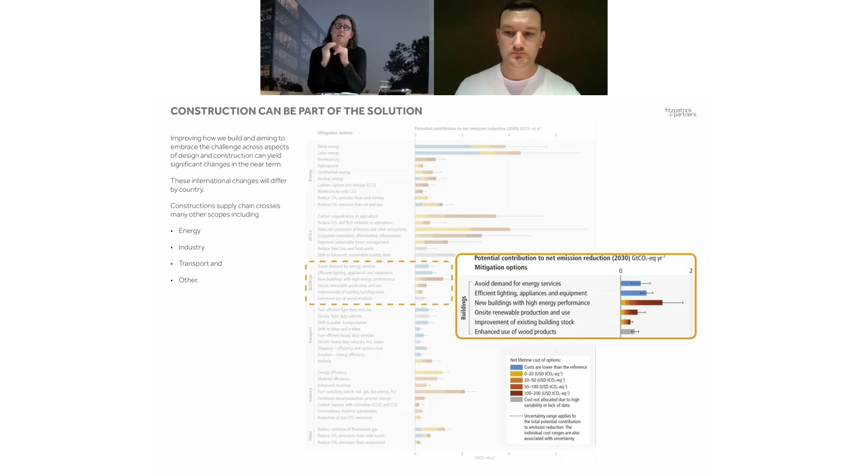So that's about avoiding energy, energy efficiency, making buildings high performance, putting renewables on site, improving existing buildings, with the exception of the bottom one, which is the use of timber products, and more on that later. The rest of them are really about operating carbon. These are global numbers. These aren't specific to Australia. But I think we would all know that buildings and construction also have an impact on energy, industry, transport, and even some of the stuff that sits in other.

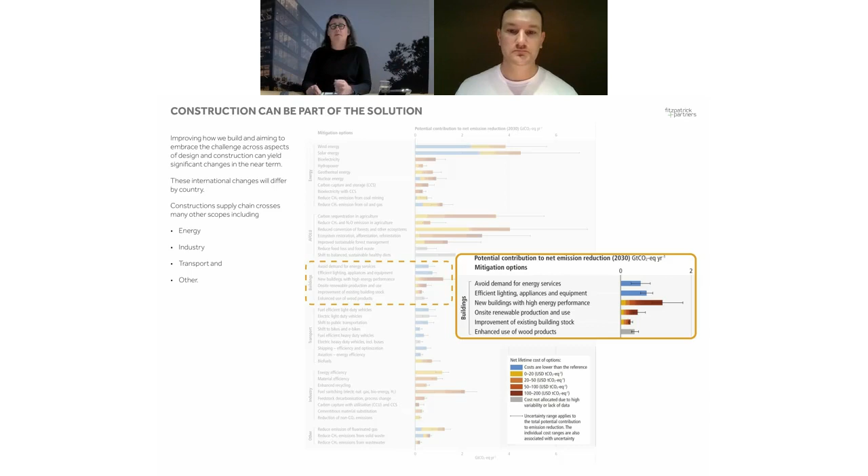So holistically, we sit at the centerpiece of consumption in construction, which is to say that the building site is where everything gets consumed. All of the products that we use to build the building and all of the things that we consume energy with are consumed in the building, but the influence of that is global, both in emissions, but also in positive and negative impacts more broadly.

So to just drill into the energy one, for example, and this is a diagram I'm sure a lot of people are across, buildings are responsible for 39% of the energy-related CO2 emissions as at 2017, of which 28% is operational carbon and 11% is embodied carbon. Embodied carbon being the carbon we build from, operating carbon being anything with a plug. And where that needs to go, you can see this line follows that parts per million line quite well, and where it needs to go as of now is straight down. So that's quite a big shift.

Why do we need to do it? Why do we care? Well, reducing the amount of carbon in the atmosphere obviously will mitigate the impacts of climate change. It'll improve public health, boost the global economy, maintain biodiversity, and in simple terms means that we have enough air, water, and food to be able to feed ourselves and future generations.

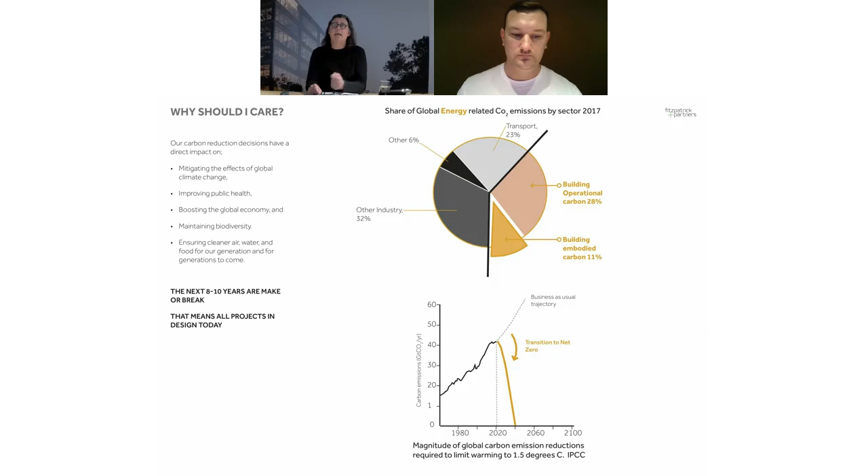Now, given the trajectory and given some of those planetary boundaries we talked about, the next 8 to 10 years are critical. Now, for the vast majority of us architects, what that means is the projects that we have on our drawing boards now are at play in this space. We need to act now and act decisively.

Architecture, as I'm sure everybody would agree, is an act of optimism. We project ourselves into a future that is as yet unwritten and unknown and unknowable, and we propose a position as to what the buildings of the future should be. But architecture is a key contributor to climate change. So how do we square the circle on that? How do we remain optimistic and still build? What can we do about it?

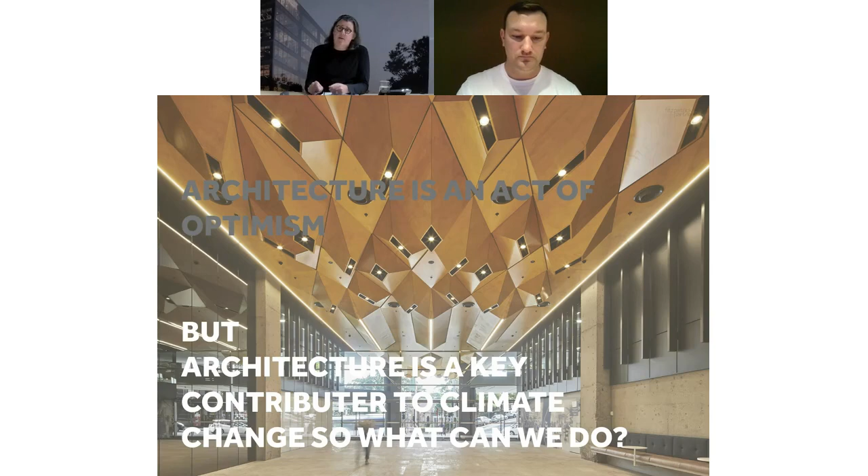Well, the first thing that we can do is understand all of the various bits and pieces of jargon. Hint, top corner. This whole world of carbon is new to an awful lot of people. If you went to university when I went to university, we weren't trained in this, and you're having to learn it now, and there's a degree of change associated with that, and people don't like change. But the first thing is understand the language of carbon, understand what causes it, and what the differences are.

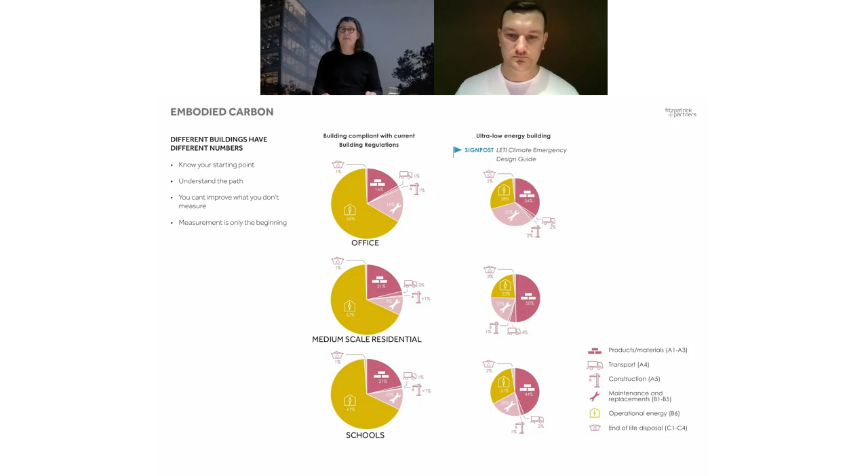And then how we can improve is by measuring, and measuring is just the beginning, because once you measure, then you act. So drilling into that one step further, looking at that embodied carbon component, this is taking the office piece. We now are talking about 48% being in the product stage, with 45% in the maintenance stage. Of that 48%, which represents effectively upfront carbon, we break that down further into the superstructure and substructure as the primary components, amounting to about 65%. Again, all of these numbers are generic. Anytime you see percentages, they're not based on a specific building, they're based on generic overall numbers, so it's important to keep sight of that. Hint in terms of question.

But structure, facade is the next big one for office. Again, this is just office. Then MEP, then internal finishes. Looked at another way, and I find this bottom diagram really quite helpful. If you look at the top 5 components there, upper floors, foundation, envelope, frame, and piling, they all represent somewhere between 10 and 20% of the overall embodied carbon of the building, and they all have the biggest impact to change. Get to below that, internal walls represents maybe 7%, ceiling finishes 5%, floor finishes less, and external works less again. And then obviously the capacity to make change in these is still there, still not insignificant, but it's nowhere near as big as structures and the overall piece around the envelope and structure of the building.

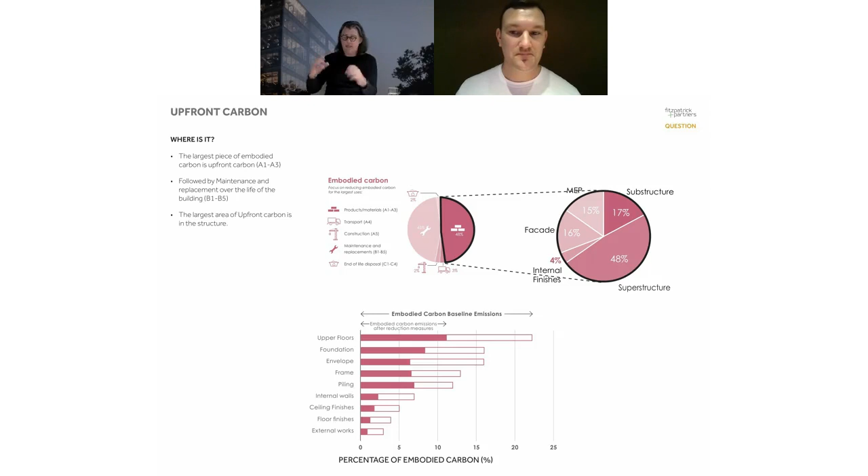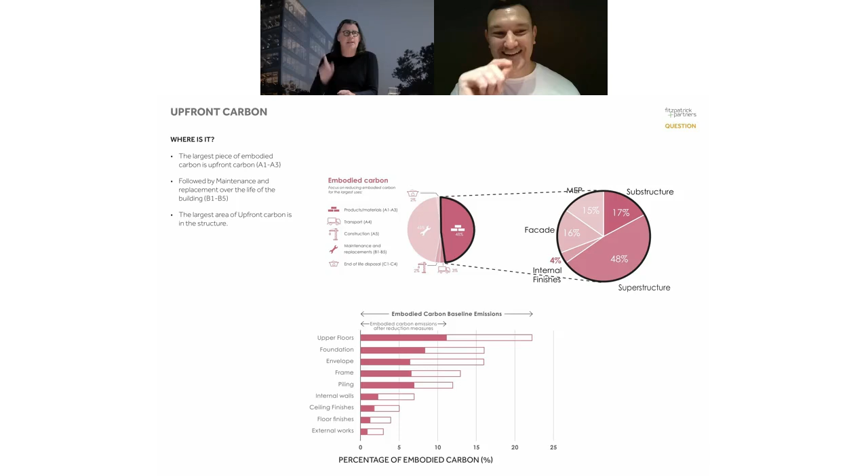Paul, just very quickly, we can't see your cursor. So okay, right. So if you can't see my cursor, anytime I say hint, have a look in the top right-hand corner for question. Yeah, sorry. No problem.

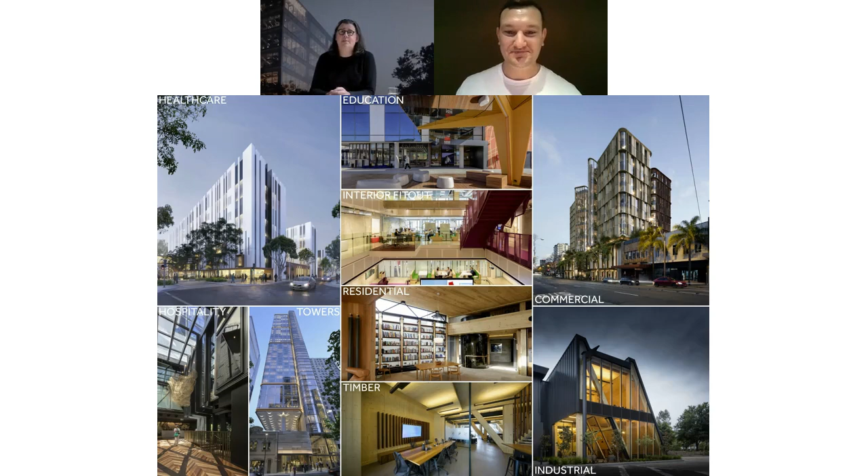So who are Fitzpatrick Partners, and what are we doing about changing things? What part do we have to play? So as I said earlier, we're a firm of architects of about 40 people in Sydney. We've been around for about 21 years, got quite an established reputation across towers and healthcare and commercial buildings and a series of other things. And we've had a passion for timber for quite a long time. We developed, as part of our sustainability action plan, a series of strategies and principles to work through across all of our projects.

So in the first instance, looking to not build on greenfield sites or avoid it as much as possible, building in density into our cities, planting more than we remove, reusing already spent carbon, which is existing buildings, and not forgetting in all of this discussion around sustainability that we actually design for human joy and delight. The middle line is a series of moves in terms of carbon in general. The first of which is all of our buildings shouldn't have fossil fuels in them. So we seek to avoid that at all costs wherever possible.

We then obviously design with minimizing energy needs as a focus. Then the use of green power, strong emphasis on minimizing embodied energy, which as you saw in those previous diagrams, becomes an increasingly large component of the overall pie. And then finally offsetting what we can't already remove. Our goal is that strategically sometime between 2030 and 2050, and I'd like to think sooner rather than later, we become a fully regenerative design practice.

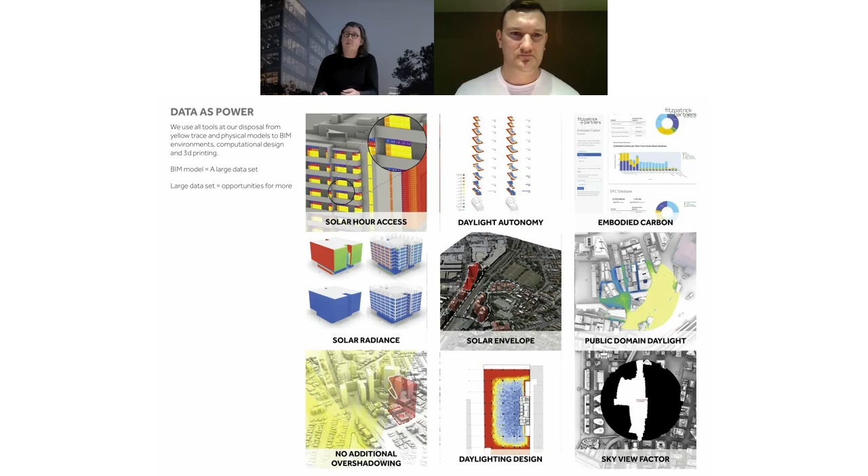So our approach when it comes to embodied carbon, drilling into that in a bit more detail, is first and foremost to question everything. Be very careful what information you're basing your actions on. This is relatively new space for lots and lots of people. Everybody's on a journey of learning. There's nothing wrong with that. It's great to ask stupid questions, and I'm always a big fan of asking stupid questions because you learn something.

Learning to focus on the big wins, structure being a key one, obviously. Devise actionable approaches that go beyond principles or airy-fairy words, but as you'll see in some of the case studies I'll show in a second, really actionable ways to remove and reduce carbon. And being really careful of unintended consequences, because not all roads lead to the same place.

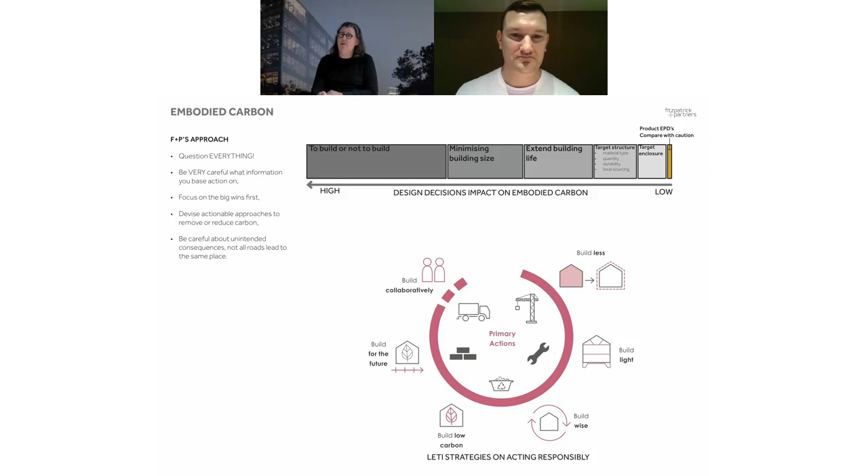The two diagrams on the side talk to how we can minimize embodied carbon. First thing is, do you need to build it? Second thing is, what size do you need to build it at? Third thing is, can you use a building that's already there? Then target structure, then enclosure, and then really getting into the finer details of EPDs and specific products. The bottom diagram's a LETI diagram, same logic: build less, build light, build wise, build out of low carbon materials, build for the future, and build collaboratively.

As architects, we have a great position in terms of advocacy. We also have a great position in terms of our role in construction. 80% of the life cycle impact of a building is locked in at that foundational stage up to schematic design. So that's when we do the passive principles of solar orientation and wind orientation, the sizing of the building for its use, the definition of the overall aesthetic, the window wall ratio, defining the systems that are used within the building. That all happens in the bottom of that fat triangle.

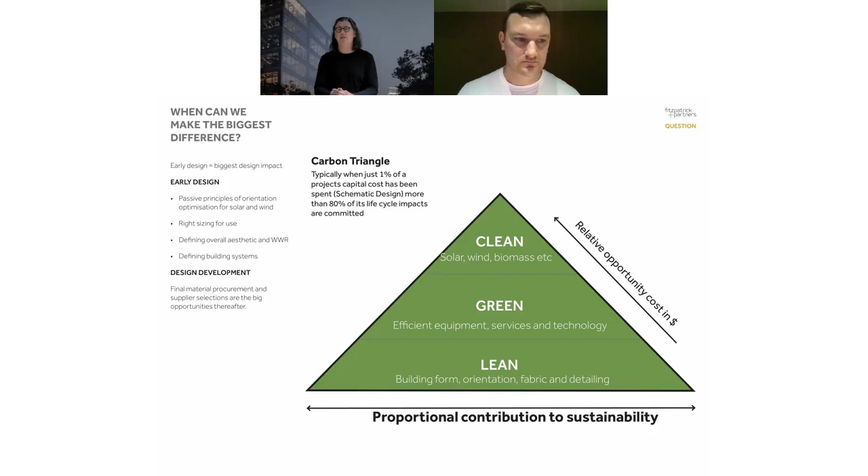And then as you go further and further towards the top, you get into building, material procurement, and a whole series of other entities about design for disassembly and things like that. But the relative cost of making change later in a project, it's the same old bell curve as you've seen for many other uses. But we as architects need to realize that there is power in our position, both in advocacy and in the decisions that we make.

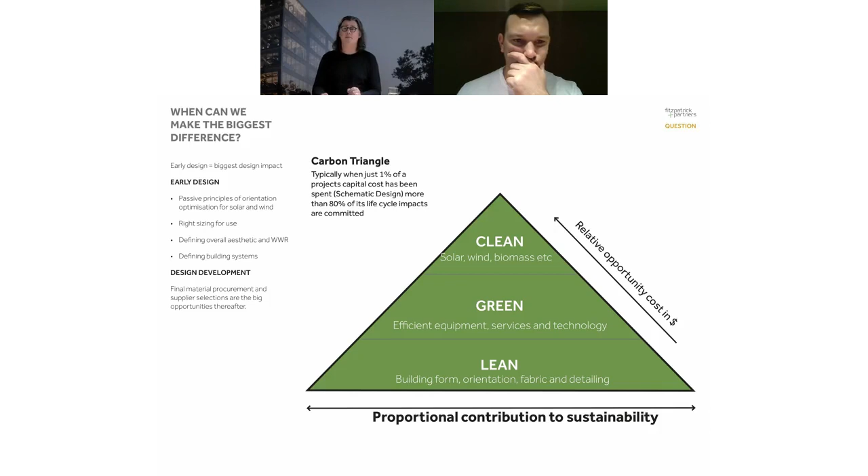And there's also therefore great responsibility. So let me go through some case studies. I'm going to go through, in the first instance, 73 Miller, and then step through a few other projects, just really to give you an understanding of how these projects are acting and how we're growing over time a body of knowledge.

73 Miller, office building from the 80s, completely unremarkable to my eye. Existing lump of carbon, if you want to look at it that way. A tenant was moving out, building needed a major refurb, potentially being pulled down. The strategy that we employed was to keep the existing building and to honor all of that existing carbon, but not the existing form, rethink that, reskin the building, and come up with a new entity.

In doing so, importantly, we wanted to honor the existing carbon that was spent in all of its roughness and glory. Typically we talk about building reuse in either really fine heritage examples or really robust 19th century industrial buildings with great beauty in their detailing. This was a 1980s office block built in the 1980s with the mindset of the 1980s. So what we sought to do was take it and reuse it as an entity of not heritage value, but of carbon value, of existing building value, warts and all.

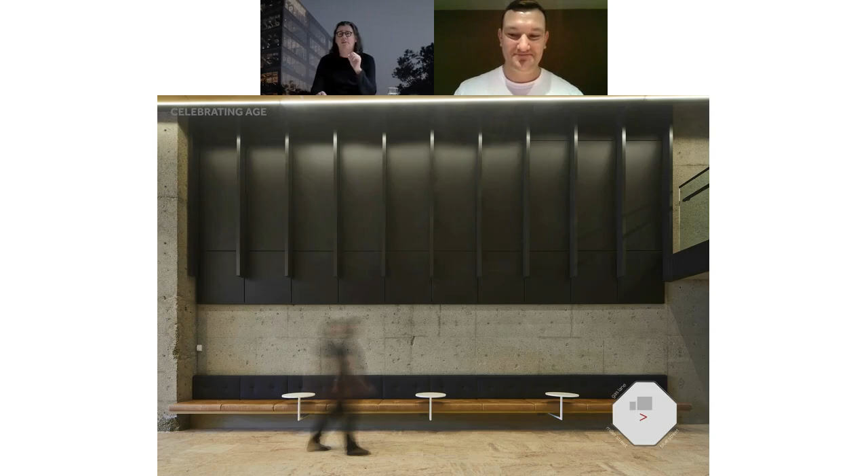So we bush hammered all of the concrete walls in the lobby, including all of the little knockoffs and little areas of imperfection, and really played them up against the new finishes that we brought in. So we had this really strong relationship between existing building that was there as a reality, and the new elements that got brought in to bring to life a new office component.

So the outcome of that was that we took 15,000 square meters of an existing 1980s building, let's call it a carbon sink, and we reused the existing structure, some of the services, and we took the material that was the dominant material in that, being concrete, and we honored it in the narrative of the building. So it became this kind of unique positioning for the building because we kept the existing 15,000 square meters.

We then added 4,000 square meters and were able to achieve a structural carbon for the overall 19,000 square meter building of only 21 kilograms of CO2 a meter squared. That's ridiculously low. But it was only that low because we reused 15,000 square meters of it.

So the outcome is a new office building designed for the future, 5-star Green Star, using green power, really set up well, that only used 4,000 square meters of structural carbon and reused 7.1 million kilos of CO2. So a really good outcome.

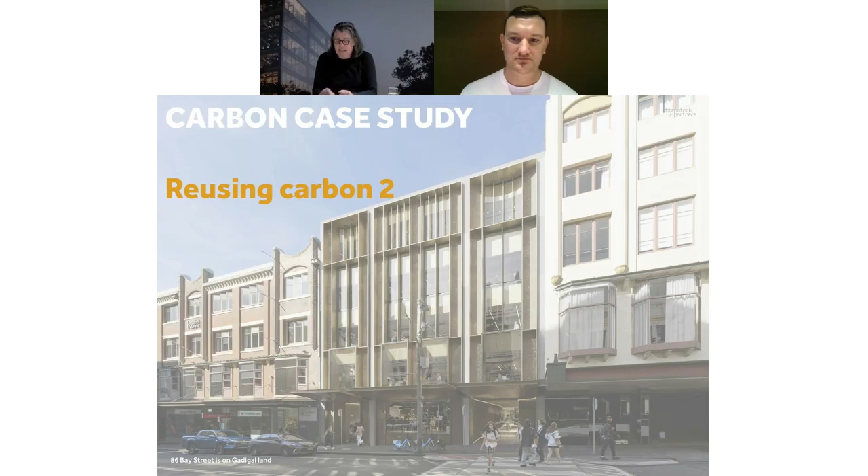Second one is a building that's just gone in for DA in Ultimo. And again, it's a similar strategy, similar mindset. We've got the ugly duckling building in the middle between two really fine heritage items on Bay Street in Ultimo. The building in the middle is a 4-story building, 3 stories here and 1 below, in concrete from the 60s. It was a detracting building in the urban environment, according to council. Couldn't agree more.

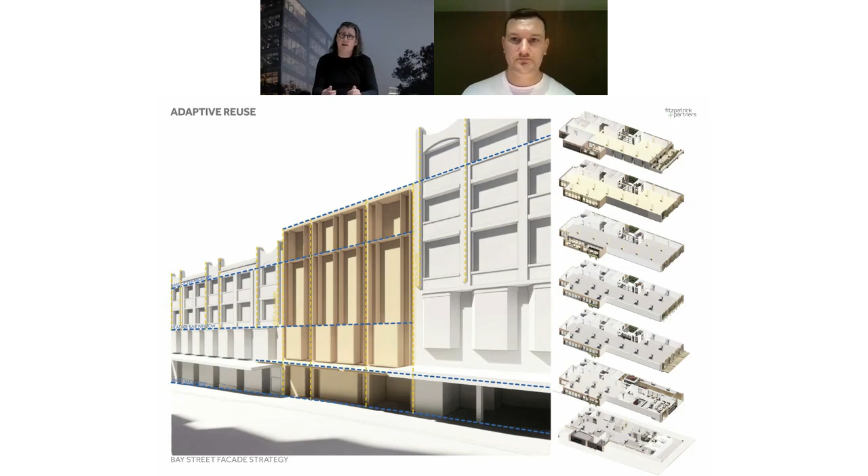But rather than having a solution that pulled it over and put a new building in its place, we sought to again reuse that existing carbon and avoid needing to use more. In order to solve the contextual proposition, we added to the building. So we added 3 stories on top of the existing 4. Picked up on a lot of relationships with the facades of the 2 adjoining buildings to provide a building that really sat well in its context.

In having the opportunity to reposition the building completely, we worked with the existing structure, but we cut a hole in it for a light well. That gave us the ability to cross-ventilate the building. We put a solar farm on the roof. We had a real focus on the embodied carbon. Obviously, it's a fully electrified building.

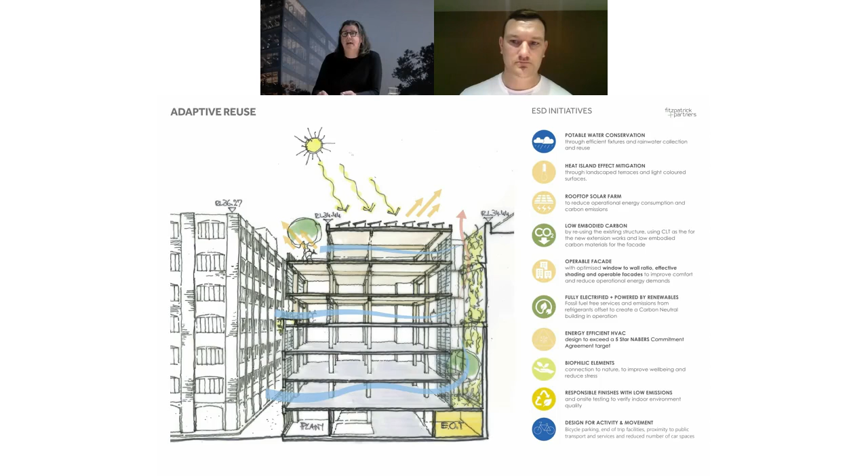And as we tend to do with all of our projects, we've summarized it in a slide like this, where we've summarized the key ESD initiatives along the side and really focused in on how the building can have a positive impact.

So you can see in the section on the right-hand side, we kept the car park level, replaced an awful lot of car park with end of trip, maintained 2,200 square meters of office space on the next 3 floors up, cut a courtyard into it that then meant all access via the lifts was through this central courtyard, allowed us to naturally ventilate the floors, and then added on top of that 3 floors, accounting for about another 2,000 square meters of floor plate.

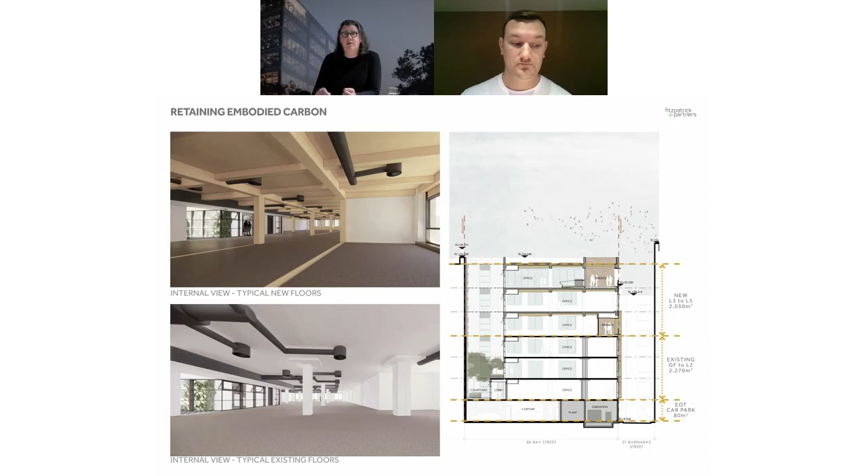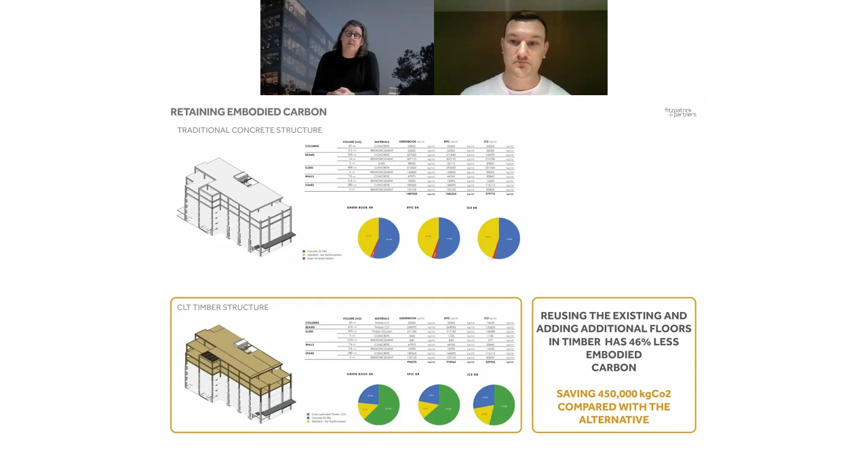Top 3 floors we did in timber. The bottom floors we maintained in the existing concrete. In doing so, we analyzed the building relative to an alternative. So as it says here, we saved 46% in embodied carbon by doing it in timber. Another way of looking at that is, if we did it in timber and that was the base case, had we chosen to do it in concrete, we would have added an additional 80% on top of the carbon necessary to build it in timber.

Why would you do that? The ultimate solution here saves, or avoids the spending of, 450,000 kilos of CO2 for a really small, modest building. So scale isn't necessarily an issue. We can do it at any scale and we can have an impact no matter where we are.

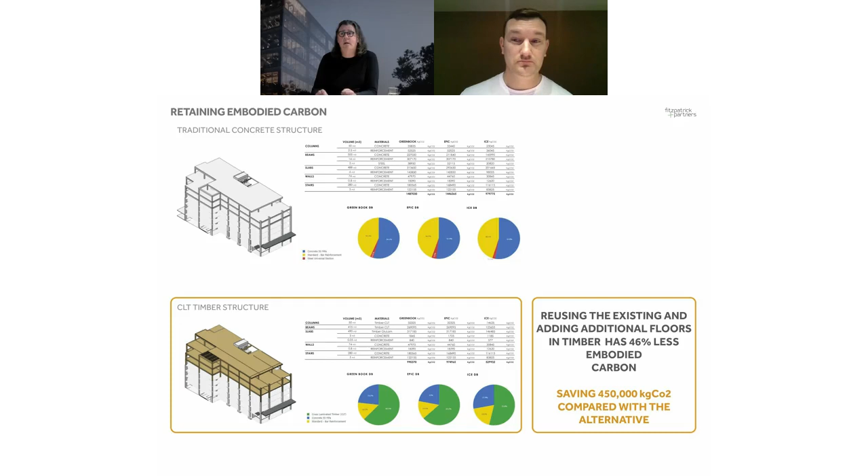Timber is a key theme for us. We've been investigating timber for 15 plus years now across all kinds of typologies. These are all buildings that in one way or another integrated timber as part of the solution, some built, some not. We are at the point of really being a timber first practice, and that comes from a carbon centric logic, but also the beauty of the material. And hence we're very aligned with Stephen, with Abodo, in terms of where they're headed as well.

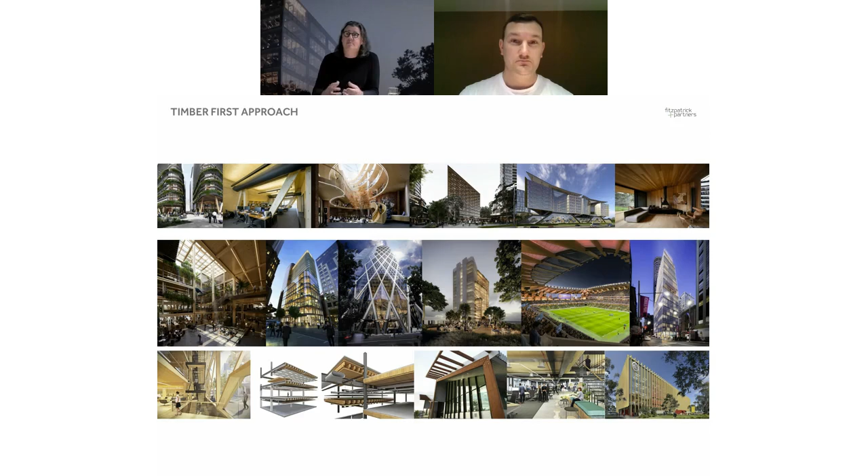So with timber first as an approach, we're very proud of buildings that we're just finishing now in timber. This is the Bond at Northwest, our first completed office building, full office building, I should say. We've got one around the corner that's much smaller, a little office building as an extension.

So next case study. We're flying through these, Steve.

Next case study is structure and facades. This is 44 Waterloo, which was an office building we did somewhere in between various COVID lockdowns at Macquarie Park. We did the design for this. It's about an 18,000 square meter office building, the first of 3 generic speculative office buildings, so 5.5-star NABERS, conventional low temp, low flow VAV system is the mechanical solution. Its orientation is about 45 degrees to north. And again, you can see the summary of the various ESD initiatives that we've undertaken on this project.

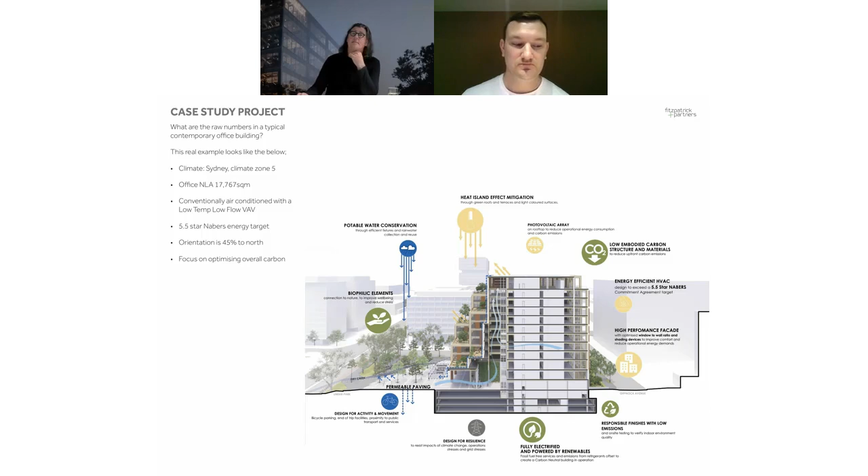I'm going to focus in on 2, the first of which is about structure and again, carbon. The second of which is about the facade. We also spent a long time focusing on things such as providing outdoor space on every level for tenants, having a human scale base to provide activity, both focused on trying to get people back to the office and out of home. We also looked at central atrium for passive return air. The structure at the bottom left-hand corner was a big thing, understanding it, pulling it apart, trying to get the best out of it, and then operating carbon in terms of the facade will be the second thing I touch on.

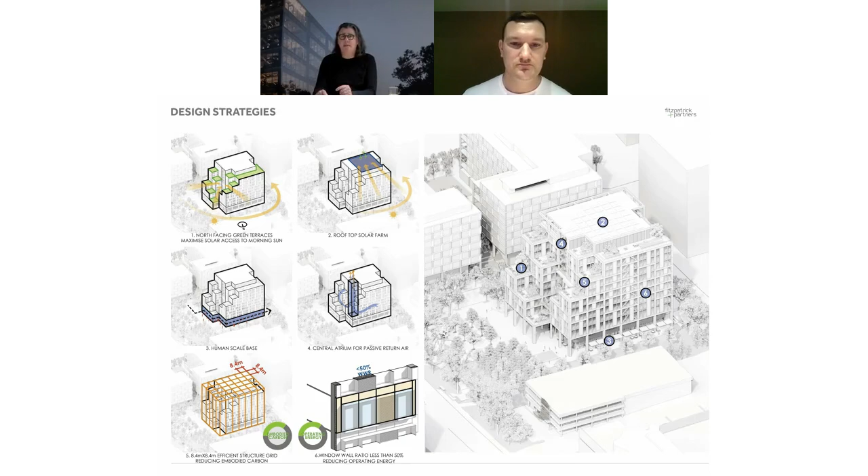We did a study as part of Architects Declare, a group of 5 different firms teamed up with 5 different students to understand embodied carbon using eTool. So we had a great student who worked with us from Sydney Uni, who worked through with us the 6 or 7 images on the screen here, the structure that lies behind them all, starting with the benchmark, which is where we thought we would be, a 9 meter by 13 meter concrete grid for the building, and then working our way through a series of different solutions from pure timber to timber concrete hybrids to option 2 in the middle there.

The 28.5% saving is all concrete, but an 8.4 by 8.4 grid rather than a 9 by 13 grid. And that was a real eye opener, that just by changing the grid and understanding the design in that regard, not working with material at all, we could make significant savings in the embodied carbon of the building. And that really talks to efficiency and where we do and don't use it.

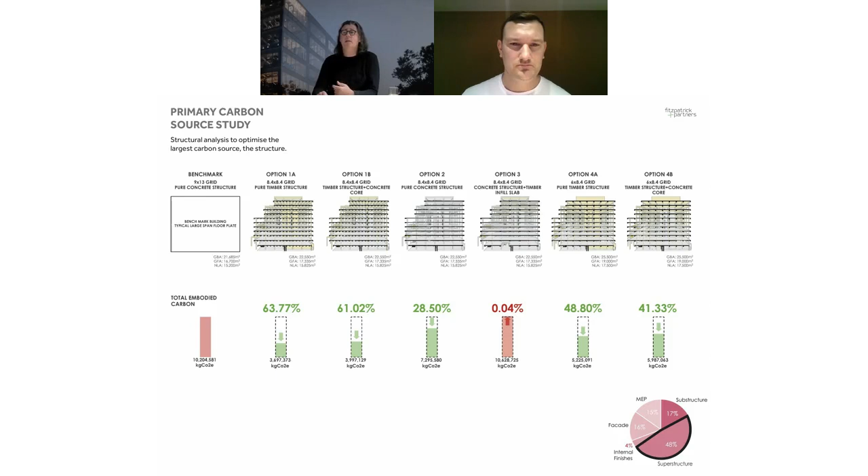And with all of these numbers going across the board, we were able to benchmark them relative to the starting position on the left-hand side. Diagram on the bottom just reminds everybody that we're talking about that 48%. So this is the biggest moves that we can make on the biggest component we can make at the start of a project. We can look at those across square meters as well, rather than across the whole building, and bring it down to a per square meter kilograms of CO2 that's in the structure. That's again really useful because we can now benchmark across multiple projects.

So doing this exercise, we learned an awful lot about not only which one is best and why, but also where the carbon is in each of the options, what the difference is in end of life versus start of life, and a whole series of other things. But the study took quite a while. It was 4 to 6 weeks, I think, to do. And we asked ourselves, how can we have this level of iteration on projects more quickly, internally? Do we need to go to eTool, or can we develop our own app?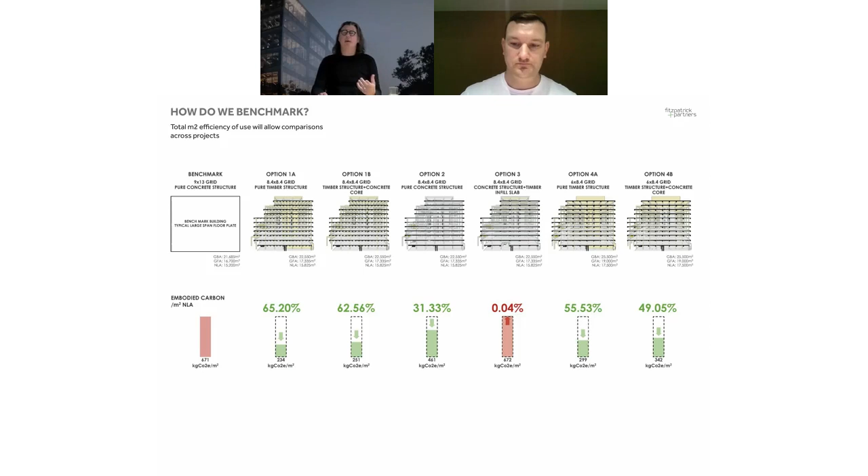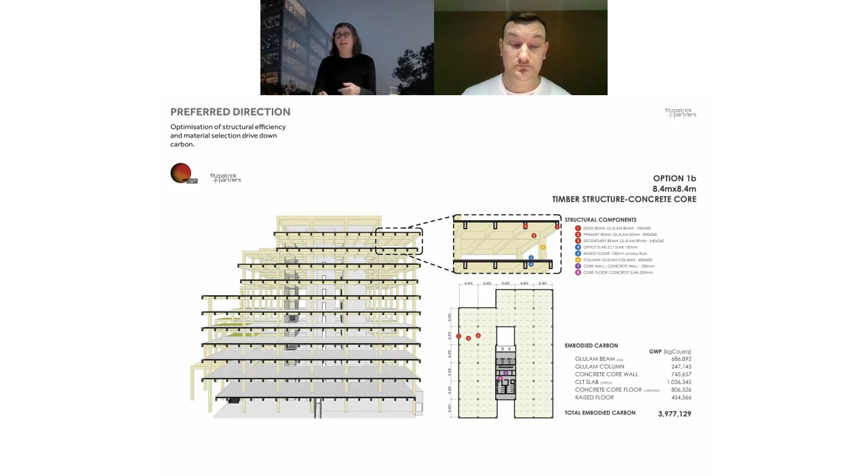So we devised all of this understanding. We had learnt, I suppose, the basics. And then from here, we launched into developing an app that would allow us to gain similar levels of knowledge more quickly and iteratively across projects. So the app is at, for those of you with a pen in front of you, www.embodied-carbons.com. And it very simply takes the structure that we've already modeled well in BIM, takes an Excel spreadsheet of that structure as volumes effectively, drag and drop that into that blue box in the middle there, and it immediately represents that in 3 different data sets.

The 3 data sets that we have internally are the ICE data set, which is publicly available, the EPIC data set, which is publicly available, and Greenbook, which is subscription data that we've got from Greenbook. So all 3 data sets tell slightly different stories. And it's not for us so much the question of which one is right. None of them are, because all 3 of them are generic numbers. So by definition, they're not right.

But it's getting relativity. So why is the ICE number 6.5 million kilos when the EPIC number is 12 million kilos and the Greenbook number is 9.9 million kilos? In order to understand that, you need to drill into what are the 3 data sets measuring. It's a very interesting rabbit hole, but one I'm going to avoid just for today.

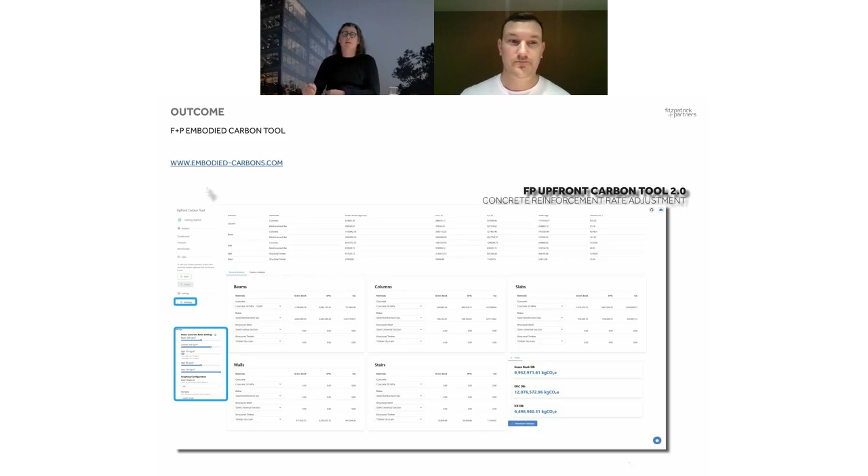The other things that the tool allows you to do is to look at the various building elements, beams, columns, slabs, walls, stairs, and be able to adjust the materiality. So we can go from 50 MPa concrete to 32 MPa concrete and see what the impact of that has on a kind of a live counter down the bottom here. We also have the ability to have conversations with our structural engineers about reo rates in the various entities and understand the impact of them. Because if I go back a page, when you look here, the yellow bar is actually reinforcement steel. So quite a large amount of it is sitting in that.

Now, you've seen this diagram already. The great thing about this tool now, this is our internal version, our external version doesn't yet have this, we're still working on that, is that we can benchmark across projects at that per square meter rate. So we can see the ICE information represented as the blue cross, the EPIC information as the purple box, and the green dot represents the Green Book information, and you can see where they sit relative to each other.

You can also see, and these are all live projects, so from left to right, the first 5 are the 44 Waterloo project that you've already seen. The next 2 are 73 Miller, both as proposed and as original. So the carbon that's in that is really the gap between those 2 numbers rather than anything else. The next one with the double circle around it is Bay Street. So that's, again, a reuse project. And on the far right-hand side is the Bond.

So we can see across all of our projects, quite openly and quite truthfully where the carbon is, and which projects are performing better than others. And we can, over time, start to understand why. For example, the third one over from the left is one of the options for 44 Waterloo, but only to ground, whereas the fifth one over is the actual option that we went with for 44 Waterloo, but including the substructure. So you can see, even including for a very large basement, that fifth one is better than the third one.

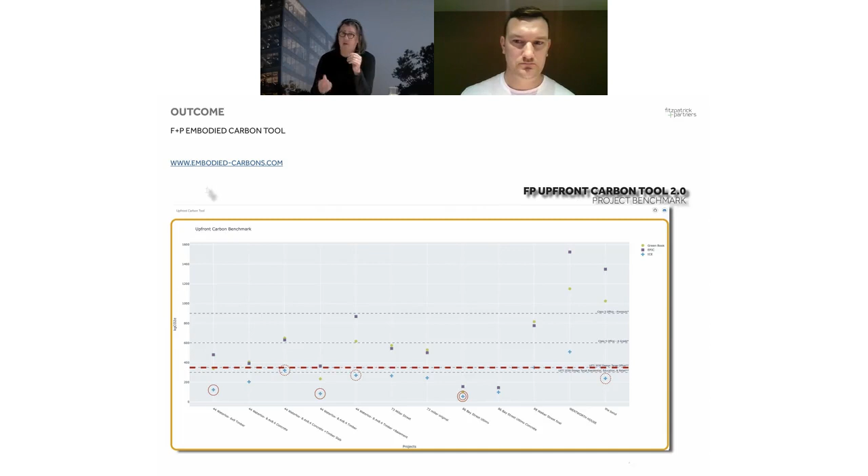So really starting to understand and drill into those numbers is quite a powerful thing to be able to do, and a really good exercise from the point of view of that project. Now, I'm going to shift gears a little bit to go to the same project, but talking to embodied and operating carbon as the point at which they interact. And that really is about the facade.

So the purpose of a facade is to connect us to the outside and at the same time to separate us from the outside. Window wall ratio is the primary thing that we use to do that. And there's a lot of things that go into window wall ratios. This is an office building, so we'll talk to some of the marketing considerations for office. Any of our leasing or tenant clients would say to us, floor to ceiling glazing is great. I want to be able to get panoramic views. I want to get connection to the outside.

That's all fabulous. But all of our services consultants would say to us, solar heat gain, we need to respond to the orientation. Too much glass is bad. There's different embodied carbon buildups in different materials. In Australia, it would seem at the moment, the norm for office window wall ratios is somewhere around 70-75%. Interestingly, in the UK, the norm is more like 30%. So they still lease office buildings in the UK. They still have a connection to the outside. It's just different.

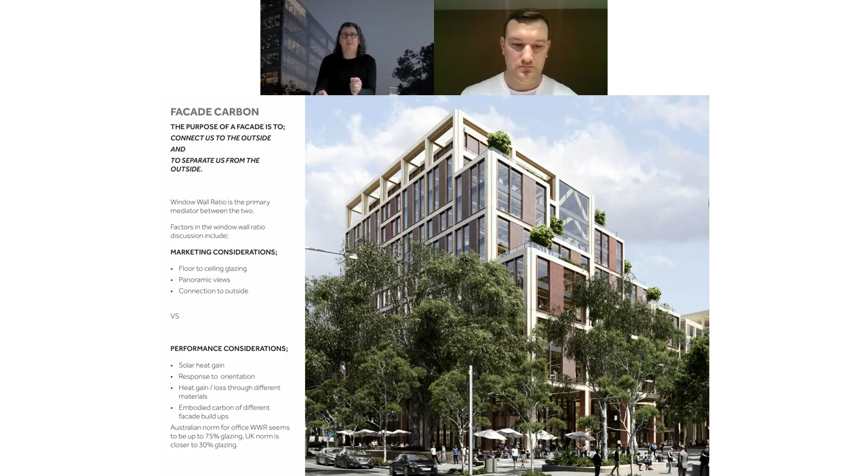So this office building, we're going to drill in now and look at just one bay, but we're going to look at it from an operating performance. There's two things at play here: insulation and shading. Insulation is defined as U value, and shading is generally defined as SHGC. So U value is, as lots of people will know, the resistance of a material or buildup to the transmission of heat from one side to the other. Heat moves, cold doesn't.

Shading is a number of different things. It's first and foremost, how much window have you got in your wall, or window wall ratio. It is the external shading that you put outside the glass, and it is the solar heat gain coefficient of the glass, which is a percentage measure of how much heat, solar radiation, a glazed facade allows to pass from outside to inside. So let's have a look at that typical bay.

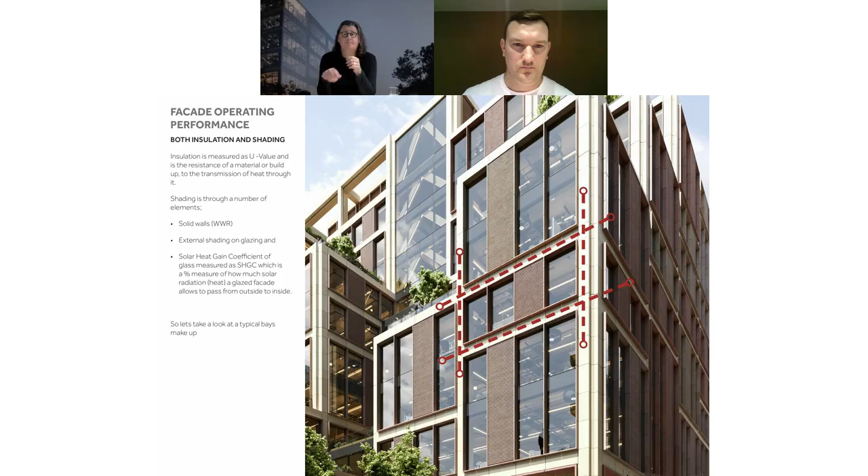Double story bay. In this instance, the one that we'll analyze is a single story bay. It's got a 50-50 window wall ratio, thereabouts. Insulated panel, quite heavily insulated on the inside of the solid elements. High performance glass in the main DGUs in the main facade. When you look at it from a U value point of view, and you break it all down, the two charts at the bottom, on the left hand side, you've got the area by material.

So the big blue one is glass. The next one is the solid spandrel in orange. The next one is the solid curtain wall section in gray. And then the mullion area, which represents about 9% of the overall area. On the right-hand side is the actual performance of that facade, so how well it's performing in terms of U value. What you see shift is the 9% of aluminium frame represents 54% of the performance number. In other words, it's performing really, really bad.

The 52% of glass is representing 35.64% of the overall performance number. And the two solid bits are generating very little, 5 and 6%. So what you can see here is glass bad, mullion really bad, solid really quite good when it comes to U value. So thermally broken frames are better than aluminium frames. Less framing is better than thermally broken frames, and probably timber framing is better than both of them if you're in an environment where timber framing is allowed on the external envelope of a building.

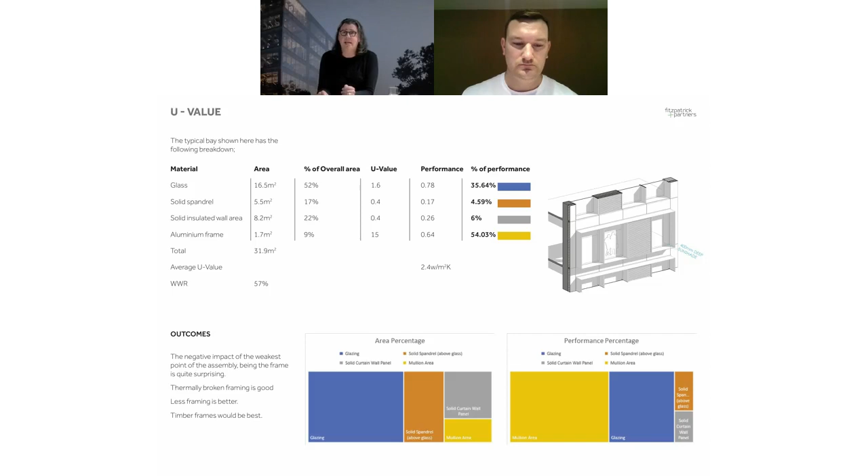To then look at shading, this is the next layer in. So SHGC tends to be directly related to VLT, which is visible light transmission. What that means is the better the SHGC performs, the darker the glass is. But you could also use lower window wall ratios, which means less glass, which means that you could go for clearer glass. But there's those market pieces around window wall ratios. So all in all, we're trying to strike a balance within operating energy. But let's have a look at the other side of the coin now. Let's have a look at the embodied carbon of the same facade.

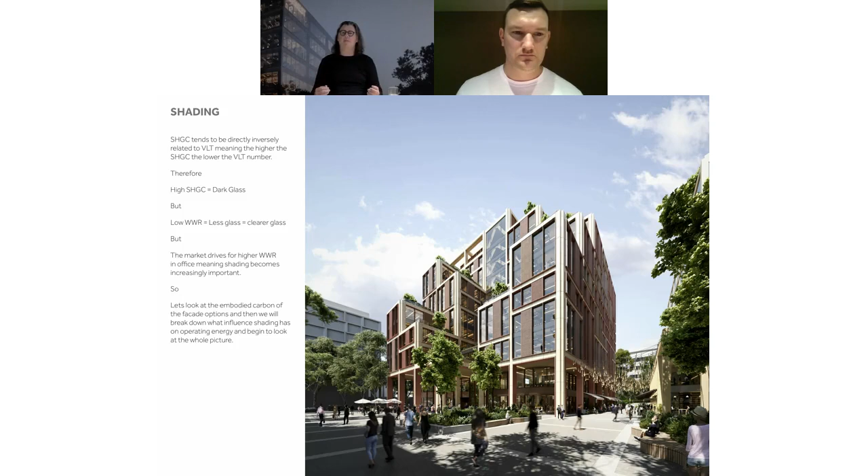Hopefully that's telling us the same thing. So typically, this is ignoring the frame for a second, because the frame being in aluminium is a bit of an outlier. So to just look at the solid panel itself, a typical double glazed unit will be about 139 kilos of CO2. These numbers are all EPIC-based numbers, by the way. A typical DGU with a spandrel, so as soon as we put that next layer in behind it, it's jumped to 390 kilos of CO2.

If we replace the outer layer of glass with aluminium skin or Equitone or Fiber C or terracotta, you can see the numbers jump around there between 470 and 290. Even an internal lining's got 71 kilos of CO2. So the lowest embodied energy of the external envelope pieces, the first three, is glass. But glass has the highest operating cost. So now we have to balance between operating efficiency and embodied efficiency.

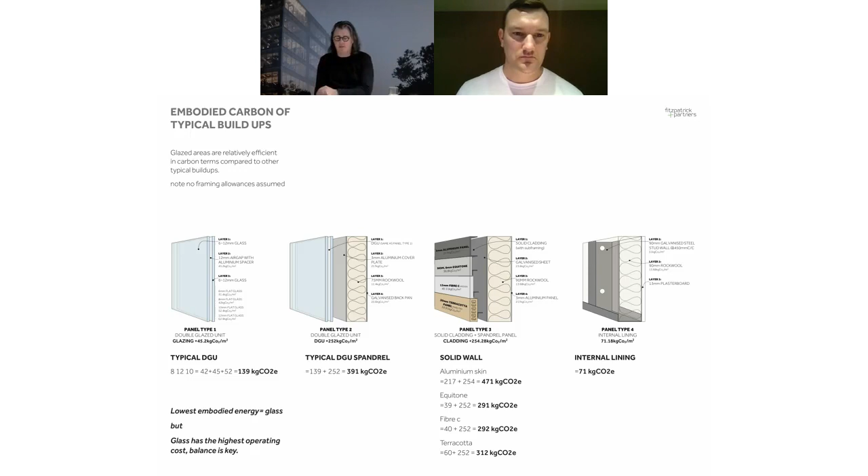So we developed a calculator. This is a Rhino and Grasshopper calculator. We haven't actually made this publicly available, but I can't really see any reason why we couldn't. So if you want to, let us know and we'll let you have it. We developed a calculator to just look at a typical bay.

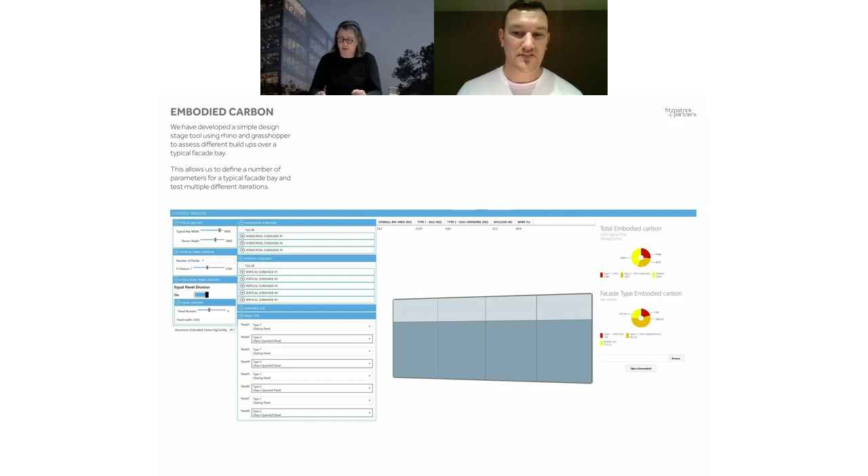Now, the reason that we looked at a typical bay as opposed to the previous calculator that looked at the entire structure is because we tend to model relatively inaccurately in facades and relatively accurately in structure, i.e. we put a box section to represent a mullion rather than something with all kinds of flutes and screw connections and everything else in it. So the order of accuracy is slightly different, but it allows us to get a sense of relativity.

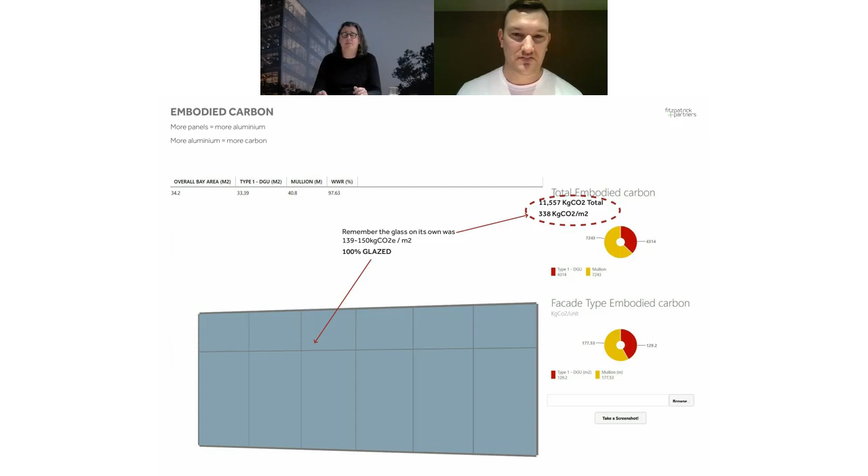So the 100% glazed area would be 139 to 150 according to the EPIC data set. And using the same data set, we looked at a framed version and we're up at 338. So you can see the difference there is just the frame. So if there was an entirely glass facade, 6 panels across this one bay of the facade, it would be 338 kilos of CO2. If we made it a solid shadow box, it's now jumped to 409. If we make it larger panels rather than smaller panels, it goes back down to 400.

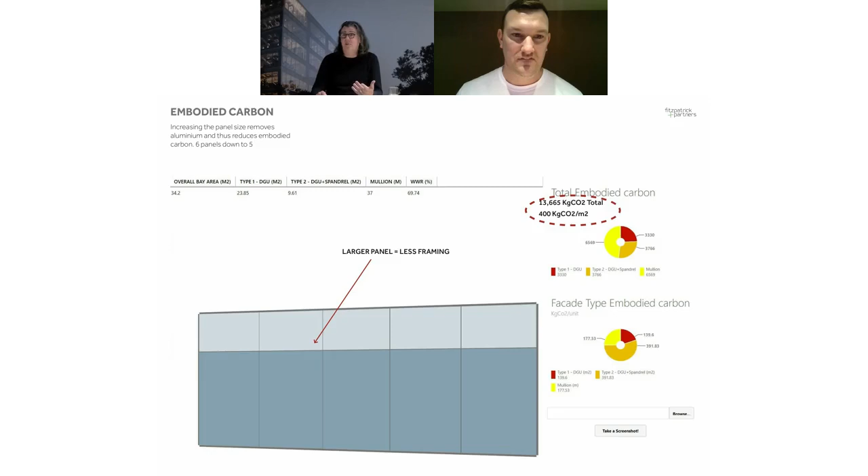So what's actually happened here is you've saved 20 kilos in relation to aluminium, but you've spent 10 in making the glass thickness slightly thicker. So it's still a net saving, but we're at 400. We still have, you know, a 70% glass facade. If we introduce a solid section, we're now up at 450 because the solid section's got more in it than just glass.

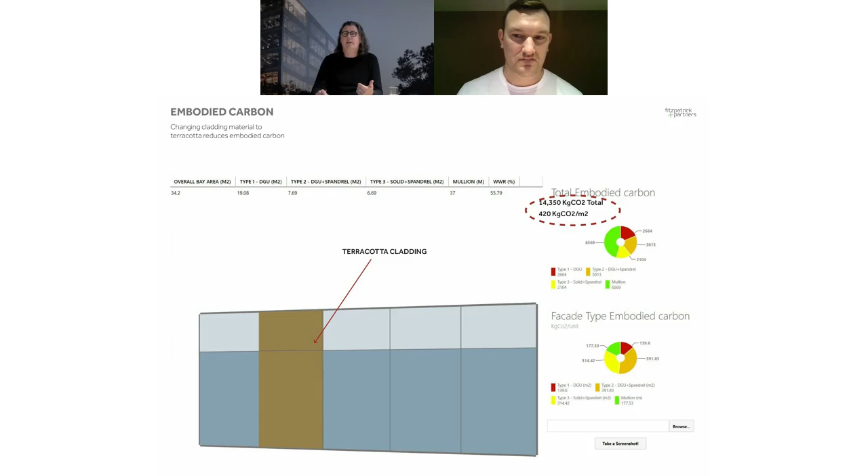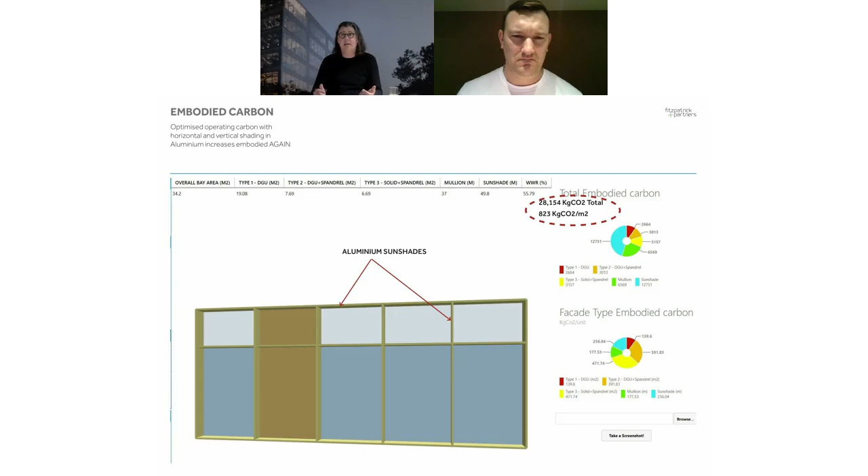If we make that solid section out of terracotta rather than out of aluminium, it's now back down at 420. If we include an aluminium sunshade, it takes a big jump to 518. If we put that aluminium sunshade around every frame, we're up at 823 kilos for the same facade. If we make all of those pieces out of terracotta, we get that back down to 478. These are all relatively rubbery numbers, but you can see that the higher performing facade in terms of operating carbon is actually a lower performing facade in terms of embodied carbon.

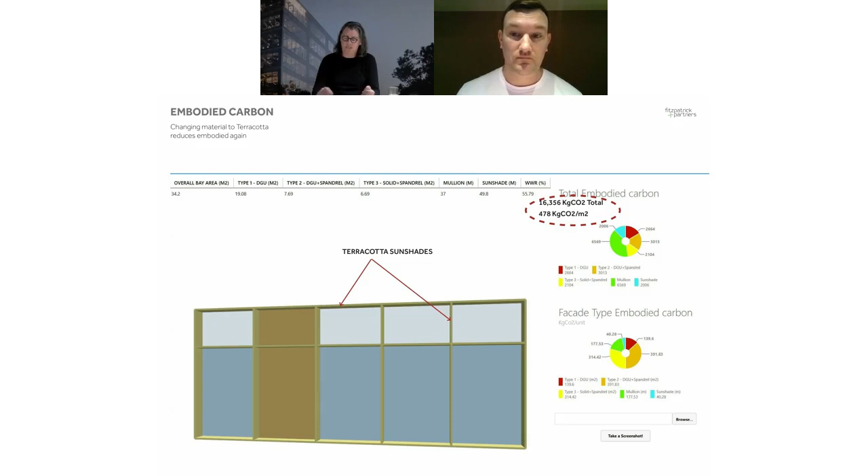So how do we compare? Well, 478 was where we ended up on that last slide. If we look at Greenbook's benchmarks, they would say that a 3-star office building should have 480 kilos of CO2 in a meter squared, 4-star 380, 5-star 290. So after putting in all of this time and effort, we're sitting at just better than 3 stars, which is pretty disappointing.

But when you drill into the data a little bit more, you realize that Greenbook uses an assumed number for aluminium of 15 kilos of CO2 per kilo, and EPIC uses somewhere between 26.7 and 32. So when we change our numbers and we use Greenbook's numbers, and we use 15 kilos for the aluminium, we get to 362. So now we're better than 4-star and on our way to 5.

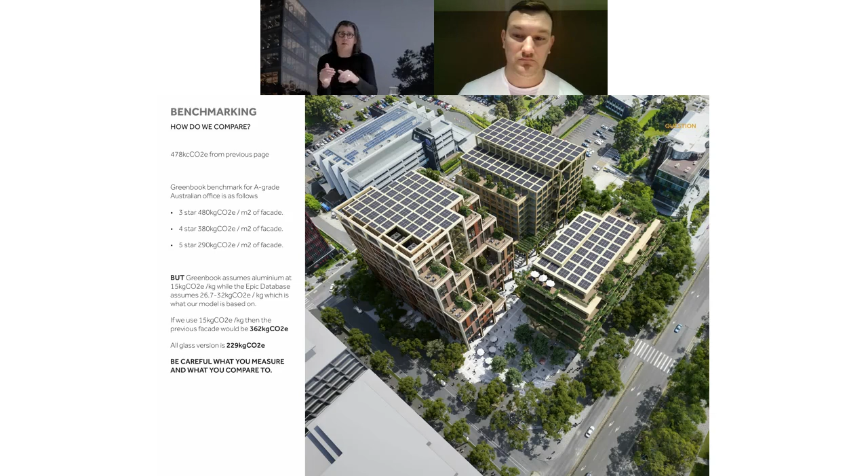That's really good. But remember, in pure embodied carbon terms, an all glass facade would be 229. So an all glass facade would be better in embodied, but not better when it comes to the balance. So you've got to be careful what you measure. You also, in relation to using different data sets, need to be careful what you compare against.

A note here just about overall kind of balance, right? We still design for human joy and delight. We could make this better by having a window wall ratio with less glass in it. We could make it better by having a floor to wall ratio that was more floor to less wall, i.e. we could make it that the building was fatter and people were further away from the glass.

The balancing factor there is we need to get to daylight autonomy numbers. Green Star would suggest specific numbers in relation to daylight autonomy, so we can run that calc and we can say, well, where do we sit? Holistically, it's about balance. It's not about being all on embodied or all on operating or all on ignoring the human.

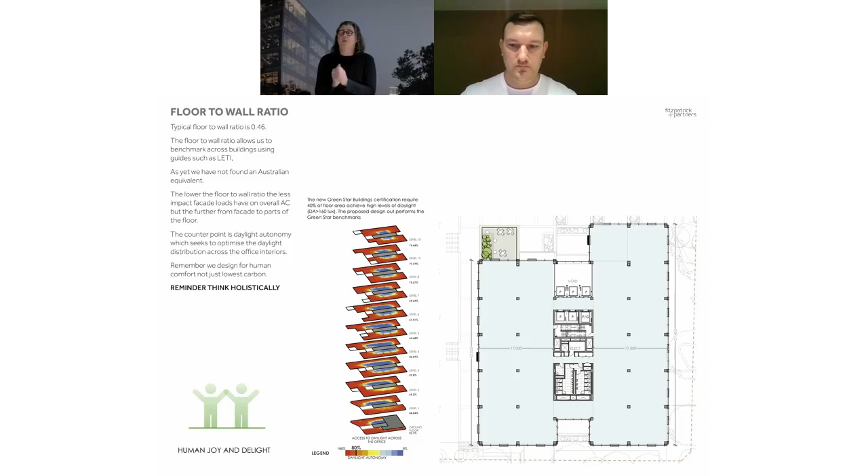So let's look at the operating component of that same facade. And what we're going to try and do now is cross the streams, right? So we get an understanding of whole of life carbon rather than just operating on its own or just embodied on its own. So remember, the building's 5.5-star NABERS, so it generates in the order of 1.1 million kilowatt hours per annum of electricity. Over a 50-year life, that's 55 million kilowatt hours.

Temperature control, i.e. moderating the internal environment for humans, represents, generally speaking, about 60%. And that's an average, but about 60% of that number. So let's just work with that for a second and jump down a couple of numbers. You'll see that 33 million kilowatt hours would relate to temperature control in the design life of this building. With the greenhouse gas conversion factor of New South Wales at 0.922, when we did this study back in 2021, that gives us 30.5 million kilos of CO2 associated with keeping this building at the temperature that humans like it for the life of the building.

So therefore, if we look at the impact of putting a sunshade on the outside of the building, we can see that we could make further savings to that 30.5 million kilos. For a 200 mil shade, we could save 7%, and all the way down to a 1 meter shade could save 23%. So that's a saving of somewhere between 1 and 7 million kilos of CO2. And as you can see on the graph on the right, there's a crossover point. What that crossover point is saying is that the biggest sunshade starts with the biggest amount of embodied carbon, but at a point in time, that saves more energy than it uses in the upfront. So that diagram looks like it makes some sense.

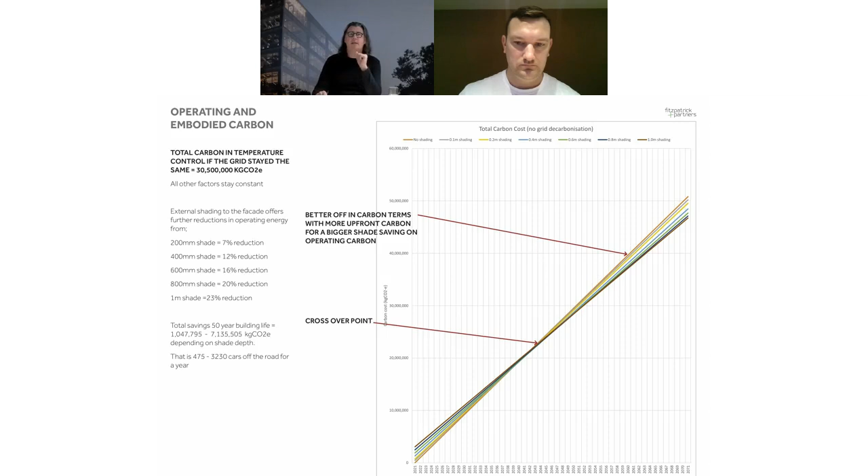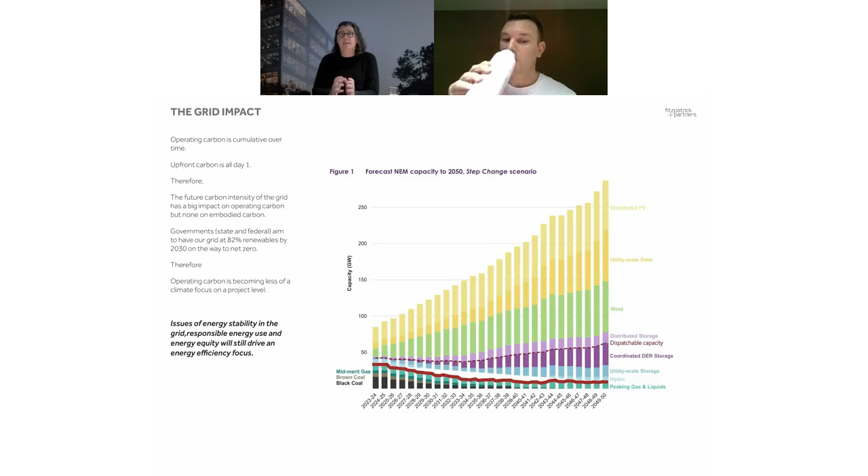So you can see here the grid from 2023 through to 2050. The red line is the amount of carbon intensive fuel sources, and above that line is renewable. So you can see the amount of energy is going to grow and grow quickly, but the operating carbon, which is the carbon in that energy, is going to drop. So operating carbon is cumulative over time. Upfront carbon is spent the day the building is built. Therefore, the carbon intensity of the grid has a real impact on our overall balance. Carbon intensity of the grid has a big impact on operating, but has no impact on embodied.

We're going to get to 82% renewables by 2030 on our way to net zero. Therefore, the operating carbon becomes less of a focus in trying to get to the right answer than the upfront carbon, even today. And if you designed a building to use green power, as I said earlier, then there is no operating carbon from day one in principle. So really the embodied carbon or upfront carbon piece becomes very much the focal point. Now, there'll still be a desire to build efficiently, and that'll probably come from things other than carbon. Energy stability of the grid, responsible energy use, and energy equity between users will be really important, and they'll probably drive rather than pure carbon reductions. Upfront carbon, the bit that architects deal in, that's going to become really key.

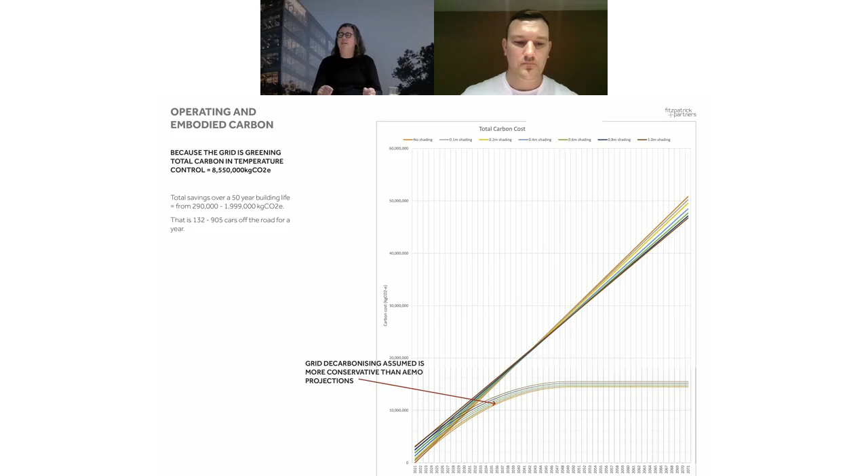The energy numbers would still follow as per the chart up the top, but there's no carbon in that energy anymore because the grid has changed. So the context into which you are building has changed. So the second thing to note is that the lines didn't cross. So with an aluminium sunshade, doesn't matter whether it's 200 millimeters or it's a meter, because the grid is greening and is therefore decarbonizing, you don't save the embodied carbon that you invest. In other words, you spend more upfront than you ever save over the life of the building.

It does cross the zero line and the curve does shift. So you would save more carbon overall in the larger sunshade, but given that it passes zero, that's a theoretical saving, not a real saving. So once you pass zero, any of the savings are kind of moot. So what we ended up with was a terracotta sunshade rather than an aluminium one. Obviously, it was minimized in terms of area to get Section J compliance today, but the context is really, really important. The greening of the grid made way more impact than anything we did on the facade.

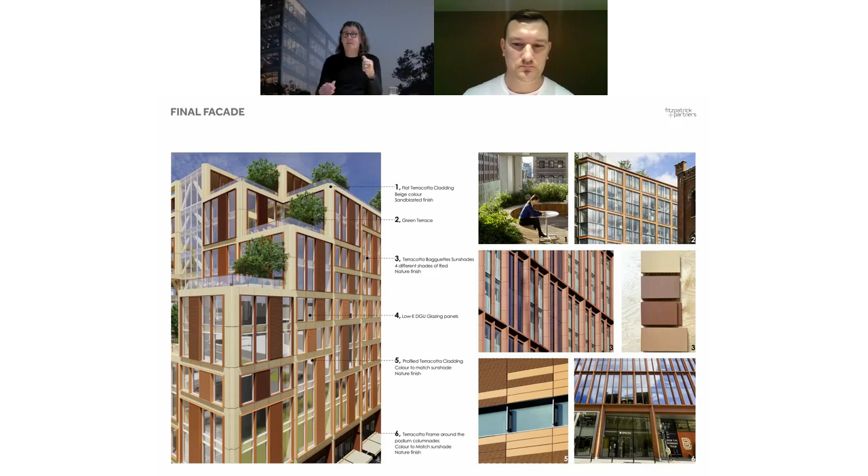So now you're back to designing for all of those other things: human comfort adjacent the facade, the right window wall ratio to be able to get connection to the outside, but still having that energy balance. That's the ultimate facade that we ended up with. That went in terracotta. That was a bit of a deep dive.

Some of the takeouts from that one are accurate measurement. The quantities that you take off are key. Shit in, shit out is the old way of saying that. Whose data and what standards you use. Try not to cross the streams. Don't use EPiC's data in Green Book or ICE's data in EPiC; just keep linear within one data set. Ideally, EPDs are more accurate, specific to one product, than generic data sets.

What's included? Are you being consistent, including just structure above ground, not including substructure, all of those things? The study timeframes that you talk to, so A1 to A3, or are you including construction? Is it cradle to gate, cradle to grave, cradle to cradle? Sourcing sustainable materials. FSC certified timbers, greener production energy.

When you start to understand your supply chain as an architect and the impact that you have going up the supply chain by asking strong questions, by demanding more from your suppliers, it's really interesting where it goes. The more of us that do it, the more impact, Steve's nodding, the more impact people like Steve in his position will take and will change overall.

Long-term considerations. We need to design for disassembly. We need to design for circularity. Different materials have different end-of-life outcomes. Timber can be reused at the end of life. Concrete can be crushed and downcycled. Really, that's all it can do. And the other thing to not feel comfortable in is the building code. The building code is by definition behind all of this. It's playing catch up. So it's not there yet.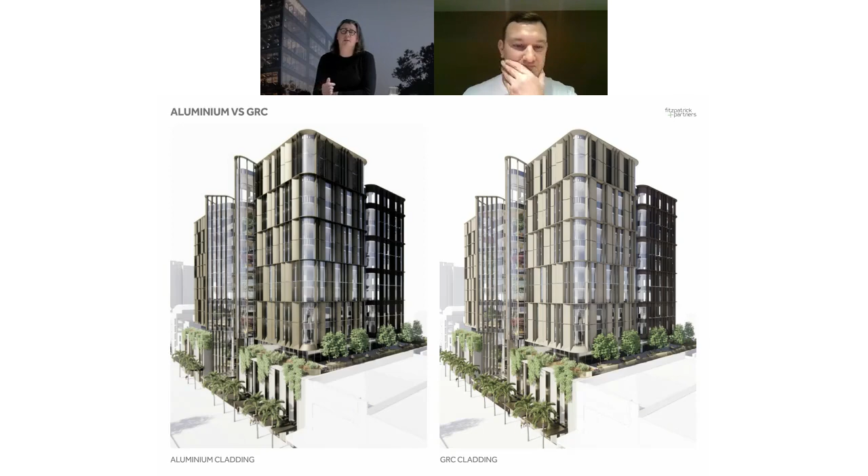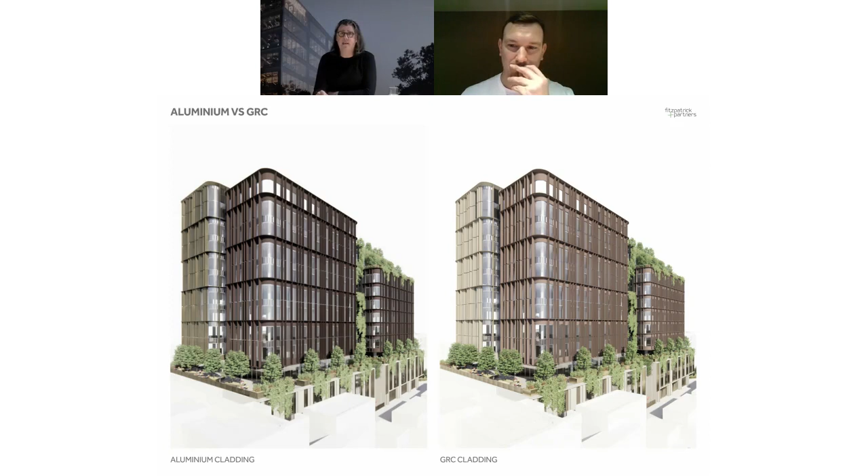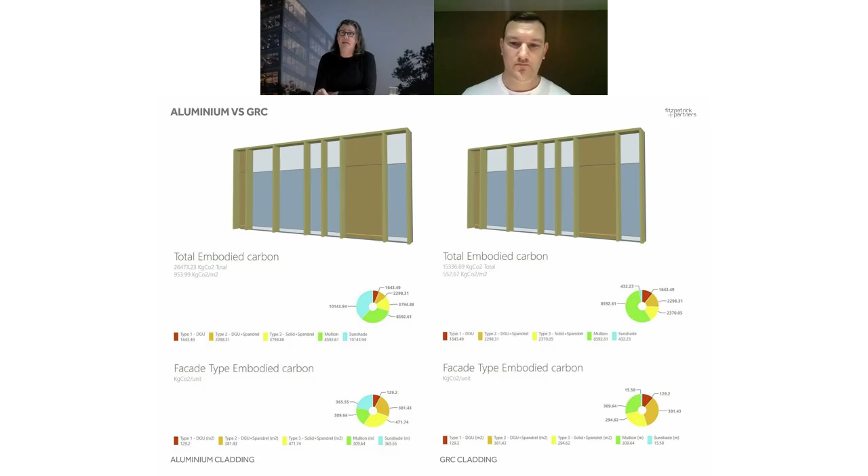So we went through and we analyzed the two of them from different views, different angles. Obviously, these are just illustrative images to say to the client, we'll provide you with the same building with a slightly different aesthetic. We dumped them into our embodied carbon calculator for facades. We took an assessment of the two different systems and their impacts. We then weighed them up against each other and realized that the GRC version would save about 40% embodied carbon versus the aluminium. That's 3 million kilos compared to the alternative. That's quite a lot.

But we also had them priced. And the GRC version was about 34% more expensive than the aluminium, or $2.35 million more expensive. So we just presented the data openly to the client. This is the embodied carbon number. This is the cost difference.

And somewhat to our surprise, the client chose the less carbon intensive version, but the one that he recognized was $2.3 million more expensive. And he knew that he could make that money back in marketing the building, even if that was leasing up the building quicker, leasing it for a higher dollar, because he had a building fit for the future. Clients are aware of this. We as architects need to be as well.

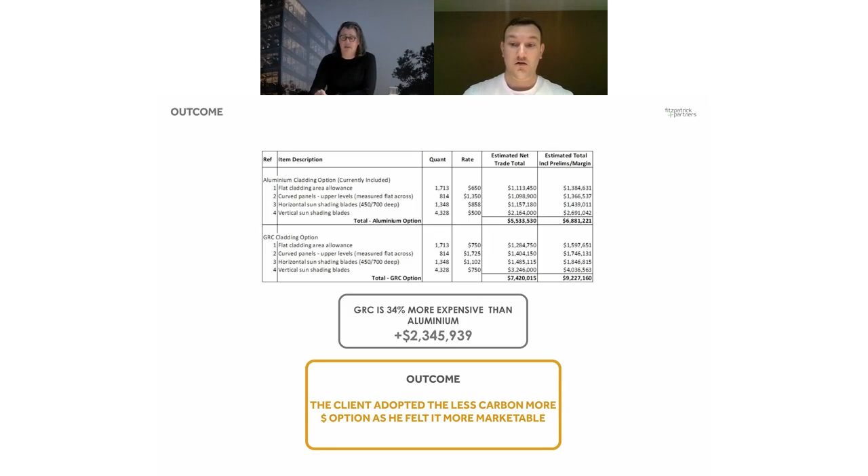And by putting the data in front of him, he made a call, and he made the right call in my view, but he made the low embodied carbon call, slightly higher cost call, but a better call. And that just goes to show the power of having the data, doing the measurements, and then putting it in front of people honestly. Not every situation is going to work out like that, but that was a really good win.

Okay, last project then. How am I traveling on time?

Pretty good. This is a Living Building Challenge project that we're doing in Perth at the moment, and a really interesting case study for lots and lots of things. For those of you that don't know, the Living Building Challenge is a ratings tool set up across 7 petals: place, water, energy, health and happiness, materials, equity, and beauty. It's divided into 20 imperatives. Today, I'm going to talk to you about imperative 11, which is the embodied carbon footprint analysis that we've done, just to stay with the theme of the rest of the presentation.

And the thing about Living Building Challenge is it is really very holistic, end to end, includes beauty, inspiration, education components, includes everything from water and energy the whole way through. This building is going for all 20 imperatives or full Living Building Challenge certification. It's a very big ask, but some of the things that we're doing, just in brief, we're providing 105% of our own power on site. You guessed it, lots of solar. We're capturing and using all of our own water.

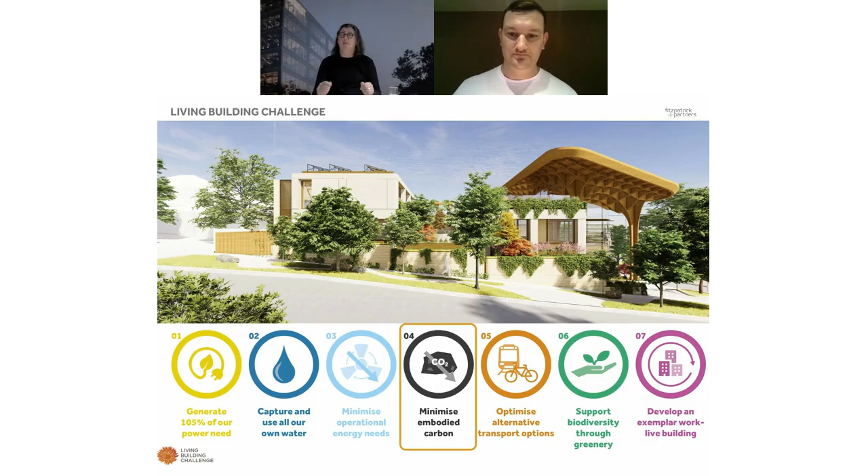So the study that we're going to talk about today in the next couple of slides, not many, is an analysis of the ground floor slab. We couldn't put timber in because it's the bit at and below ground. So we analyzed 9 different options, from a PT banded slab to a flat reinforced concrete slab, flat slab with drop panels, a banded one-way slab, a PT flat slab, etc. You can read them down the side.

We analyzed using our embodied carbon app the amount of embodied carbon in each of those options in a 2-bay representative grid of the building. So here we weren't looking at pure numbers, we were looking at relativity. So you can see that the highest option, this is on the big assumption of using conventional concrete and conventional steel. The worst case scenario at 73,000 kilos was option 9, which is the brick arch and steel structure. The best option was option 8, which is a quite deep bubble deck structure, and then followed along by option 3, etc.

And you can break down between them the different materials and the impact of those materials in their total embodied carbon. We've been researching on the project the use of Wagner's zero cement mix, so replacing cement with other materials.

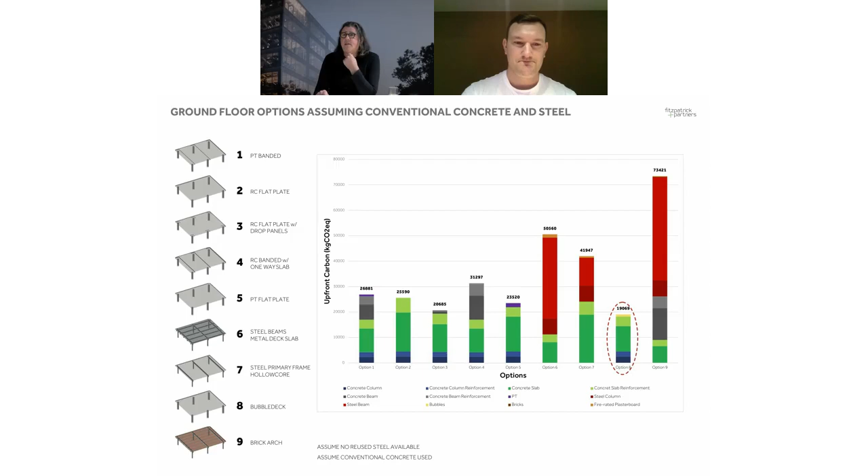And so if we went to a zero cement concrete and conventional steel, what changes in the numbers? Well, if I go back one, we were at 19,000, option 8 was at 19,000, option 3 was at 20,000 kilos. It drops by half. So that is a really big impact.

We needed to check with option 8 the impact of the bubbles. We weren't 100% sure of that. But the difference between option 8 and option 3, which is a very conventional system to fit the market, was quite little at that stage, 300 kilos across those 2 bays. The steel component, the brick arch version at the bottom here, still had a very high number, and you can see the vast majority of that is steel.

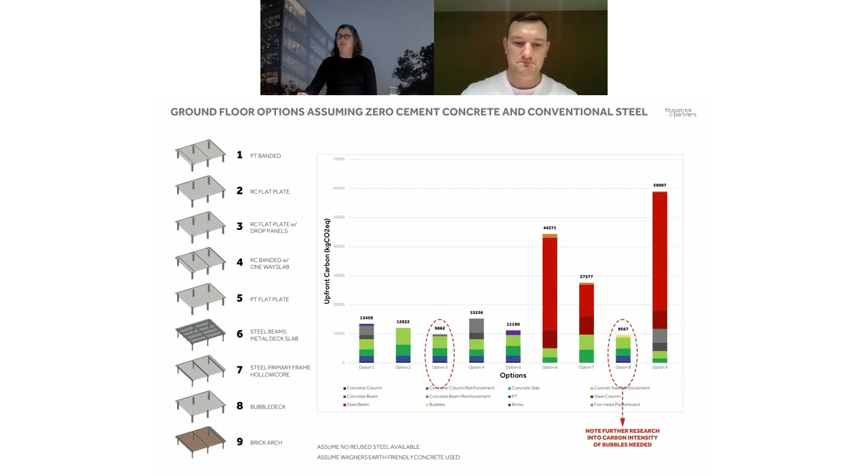So we worked out how much steel is involved, and we're currently looking at whether it's possible, what's involved in getting and recycling steel into a building, and our structural engineers are working with us to determine if that's possible. But even if we ended up back at option 3, which is where I suspect we will be, we're still at half the carbon we were when we started by pursuing the zero cement concrete. There's real power in being able to understand all these numbers, assess the different strategies against each other, and start to look holistically into the overall proposition and where it sits.

So at the moment, we're leaning towards option 3 because it's conventional, but we're still researching option 6 and indeed option 9, although option 9 probably goes by the wayside, but option 6 to see if we can get that reused steel and get that number down by another third.

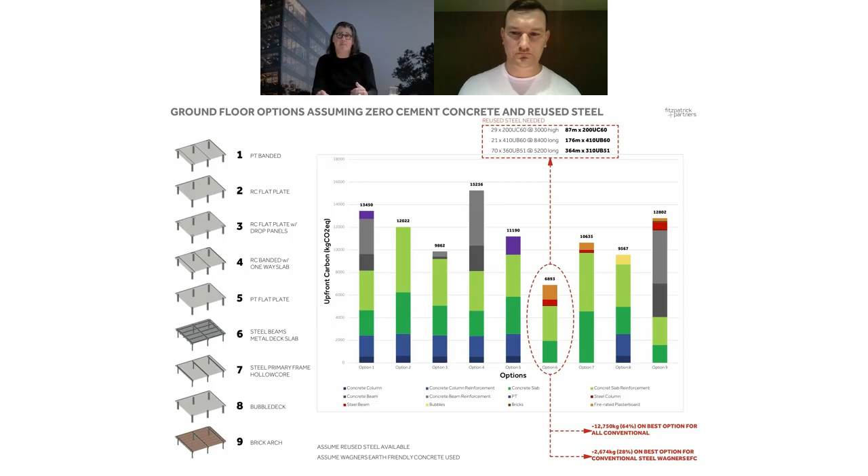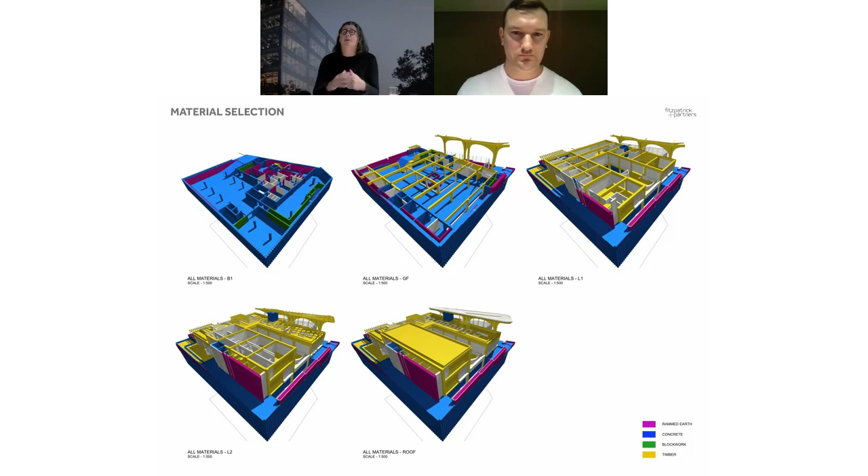So with that building, we're also assessing all of the materiality. What you see here is rammed earth in pink, concrete in blue, zero cement concrete, blockwork or a blockwork alternative in green, and timber, which is the vast majority of the building above ground, in yellow. So what all of this study has proven is strategies around carbon are really key in terms of the embodied carbon piece. Our strategies on this site include: can we reuse the excavated material, as the building sits in an environment of sand and limestone? Can we reuse the existing materials?

We're investigating with concrete suppliers the use of that material back in concrete, but also with rammed earth suppliers using that material, crushing it locally and being able to use it in rammed earth walls. We're working on a tie-up between Wagner's and a local supplier to produce 100...

Paul, can you hear us? Because you vanished. I'm not sure what happened there. We've lost him. Oh, there he's back. I dropped out. Sorry. Okay, all good, all good. Disappeared there for a second. Sorry. Didn't touch anything, I promise.

100% cement replacement in the concrete, which is really exciting. Maximizing the use of timber in the structure. We're doing the assessment now to find out the exact percentages, but a radical reduction in embodied carbon. First round of numbers look like an 80-odd% reduction in embodied carbon in the building overall. Obviously, we'll aim to make that lower, but we're also starting to look at design for circularity, design for disassembly. There's some really big opportunities in a building of this type.

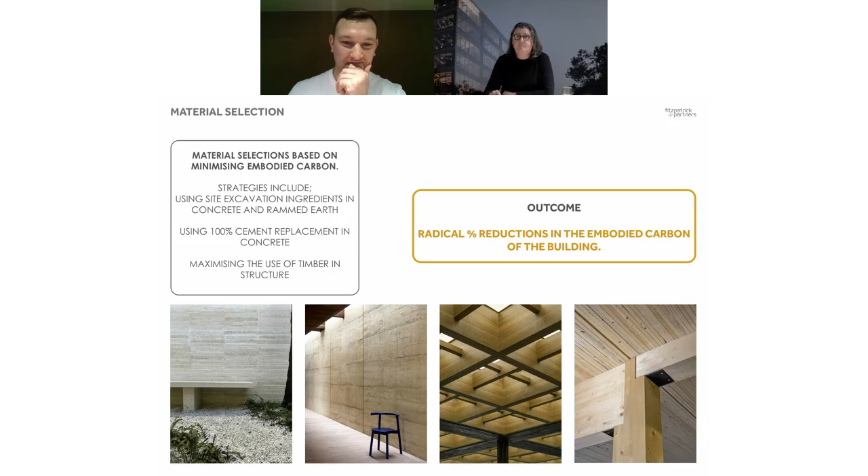So where are we at? Regenerative design is our goal. This is a great diagram from Living Building Challenge: code compliant design is improved by green design, which is improved by high performance design, but they're all really versions of less bad. Sustainable is a really modest proposition for us. To be sustainable means that we sustain our position on the planet.

Surely we would aim for more than that. We would aim to thrive. We would aim to flourish. We would aim for really broad improvement in all of our lives. And that really is where Living Building Challenge goes, and where we're seeking to try and take a lot of our work.

Big shout out to those LETI guides. If you're not across LETI, they're a really good series of explainers and guides to be able to delve into and get your head around some of the numbers and a lot of the complexity that is involved in embodied carbon.

So I hope with all of that, we've kind of proved up a little bit that embodied carbon is not just another thing to be understood and absorbed into the architecture process, but actually is a really big opportunity for us all to be able to design in a really contemporary fashion, shift maybe what we think of as great design, understand an aesthetic for today and moving forward.

So as Maya Angelou says, and I love this quote, do the best you can until you know better. Then when you know better, do better. That really sums up, I think, architecture as an optimistic movement for the future.

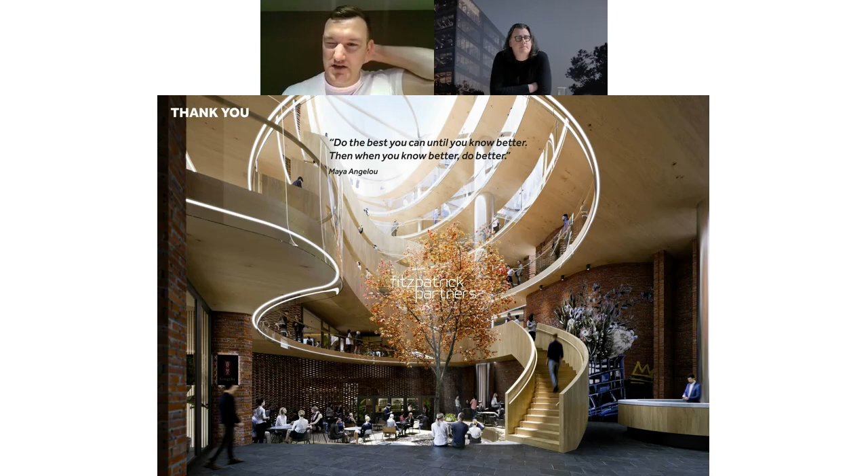There were some really good questions. One of them was, what is the benchmark carbon intensity, kilograms per meter squared GFA, you're achieving for the LBC in Perth? Good question. We're working on that at the moment. The benchmark building is a conventional building built on the same site at the same size, using what you would normally do. So it's a concrete frame building.

The version that we're doing is, we don't actually have the numbers yet, so this is a dodge rather than an answer. But I'm happy to answer the question when I get the numbers. But yeah, it's aiming at really taking a radical reduction to that number relative to the benchmark. But ultimately, for me, the benchmark is 0. You're not going to get there, but get as close as you can. Yes. Very good.

Daniel just asked, when using your app, is there a pro forma for the schedule file which needs to be dropped in? Yep, there is. On the app, if you go to how to, there's quite a lot of information on that. We use ArchiCAD as our platform of choice, but in principle, if you set up the schedule, there's a couple of example schedules there as well. If you set up the columns to reflect the same thing, you'll get an outcome. And if you've got any problems with it, give us a hoy and we'll see if we can help you.

Awesome. For the North Sydney case study, was there a GRC version that had a fire engineering solution? No, because all of that GRC sits outside the line of the envelope. So in neither case were they fire rated. So no, there wasn't a fire engineered solution for the GRC. When I say GRC, I mean a panel like a Fiber C or a Bearstone or one of those kind of products. I can't remember exactly which one we used. I think it was Fiber C that we used the EPD data for to do the analysis.